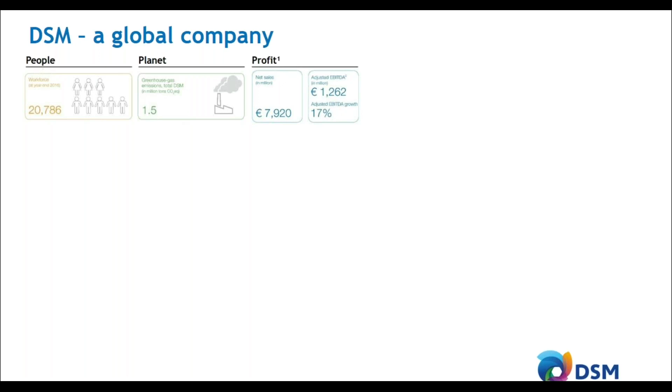DSM is a true global company. We have a bit over 20,000 talents working for us around the globe. As you can see, we are also very concerned about CO2 emissions. Sustainability is a key part that drives DSM and also the solutions that we introduce into the world. So we have a never-ending quest in further reducing CO2 emissions in our plants, but also in the solutions that we bring to you. We have a turnover of around 8 billion euro.

A large part of our talents are working in Europe, almost 10,000 employees, but we also have a global footprint, with a presence of over 5,000 people in North America and Latin America combined, and over 6,000 people in Asia. Our R&D centers are located all over the world - a main R&D center in Geleen, Netherlands, but also in Troy, North America, and in Shanghai.

Our sales are also covered all over the world. A big part of our sales are actually at the high growth economies where China and India take a really important role.

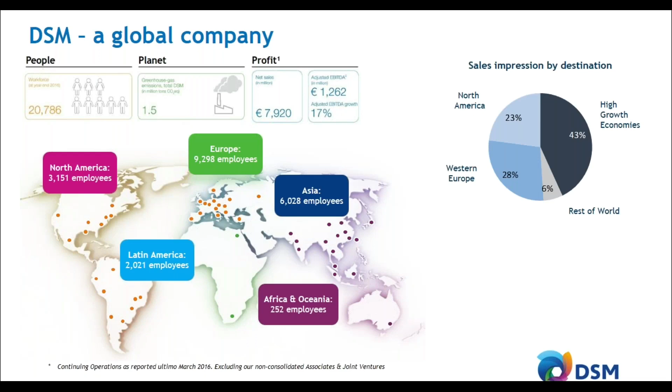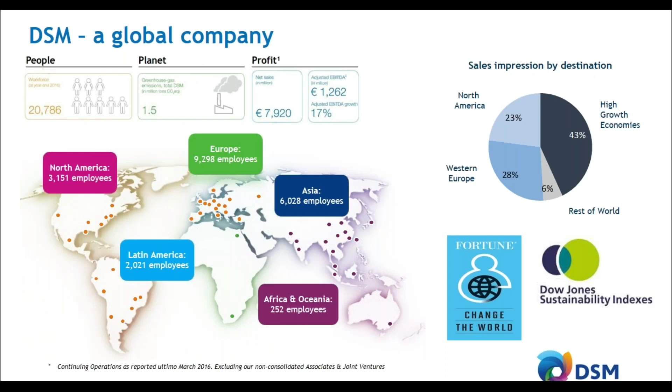We are very proud that over the past 10 years we had a top 3 ranking in the Dow Jones Sustainability Index, as that is one of the key drivers at DSM. We also have been named number 2 in Fortune's list of companies that are changing the world, among JP Morgan and Apple. So we are very proud of that. Our involvement in the World Food Programme, and all the work we are doing to leave the world as a better place for the next generations, is part of that ranking.

So what are we doing in the automotive industry and the electronics industry? As you can see, almost 90% of all modern cars have materials from DSM in them. Typical applications include airbags, chain tensioners, brake boosters, air intake manifolds, engine covers, oil pans - a lot of different applications where we are able to reduce weight or, for example, wear and friction, and therefore improve fuel economy.

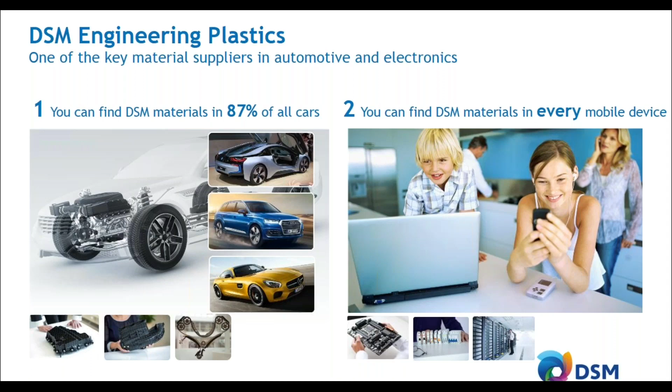On the electronics side, we are present in every single mobile device around the globe, addressing key trends like miniaturization and the elimination of hazardous substances. We have introduced some halogen-free solutions. Lately, the automotive and electronics industries are growing more together, and we see that in the electronics solutions we are bringing to the automotive industry.

If you look at the competences that you would need for lightweighting, there are actually a few. In the R&D center in Geleen in the Netherlands, we combine several of these competences, like, for example, chemistry - we are able to build different building blocks into our polymers that address the needs of the current automotive industry.

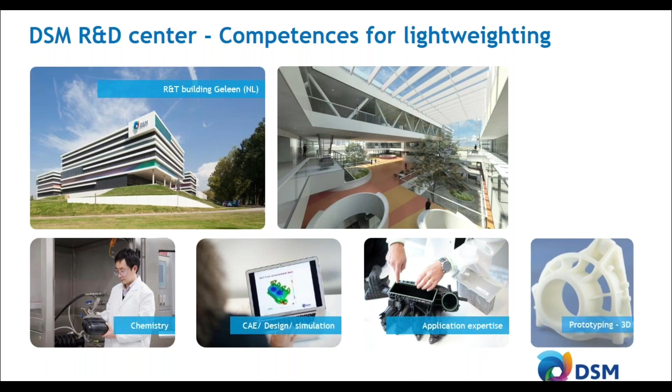We also have the predictive power to not only produce those polymers, but also calculate how your application is going to work, not only short term but also long term in your vehicle. We have application experts that can help you in redesigning from metal to plastic to further reduce weight, but also add additional performance. And last but not least, we are able to do prototyping with, for example, 3D printing, which can help you further reduce your design cycles.

What is one of the key challenges in the automotive industry? Over the past 50 years, the average weight of passenger vehicles has been growing by 10 kilograms every year, and you can imagine that adds up to a few hundred kg.

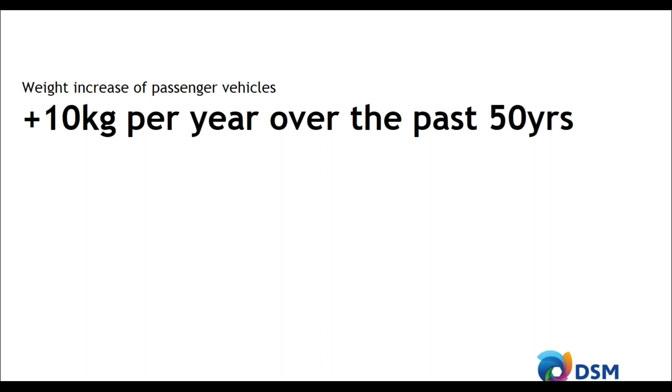And that's for a good reason. Over the past decades, more safety systems have been introduced, like ESP, ABS, and even lighting now can be added to that category. We've been increasing customer experience with adaptive cruise control, infotainment systems, further connectivity, and lately also autonomous driving, so more sensors are being built in. All of these systems require technologies that have a certain weight to them, so lightweighting is very important to accommodate these new technologies.

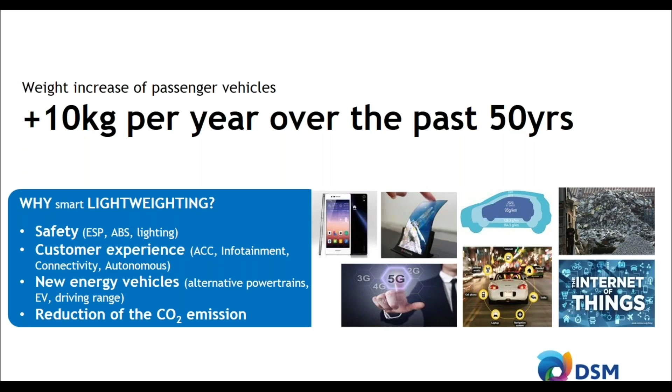Furthermore, new energy vehicles are being introduced, alternative powertrains, for example electric driving, where you have to deal with relatively heavyweight batteries. You still want to keep a certain driving range, so lightweighting is important. Last but not least, the reduction of CO2 is of course very important. Legislation is further tightening; towards 2025 we have to reduce around 44% of CO2 emissions, and lightweighting is one of the key solutions that can be used.

So the reduction of CO2 of almost 44% by 2025 means that in the end a car has to lose a significant amount of weight, almost 200 kilograms. And the question is how to do that.

There are a few alternatives in the market. You can go from steel to aluminum, which is only 1/3 of the relative weight, and that helps a lot to further reduce weight. A second option is to increase the amount of plastics you use in your car, specifically for structural parts in body-in-white structures.

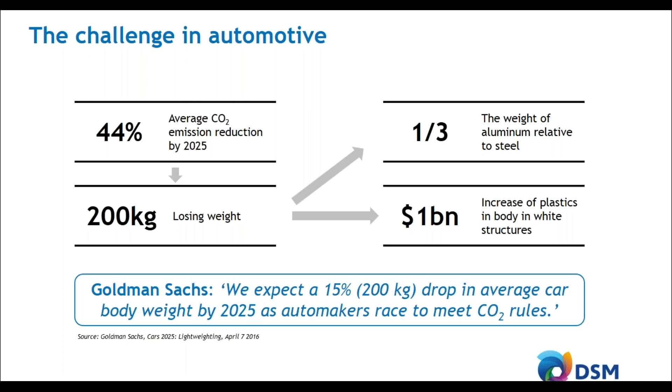But how to do that? Of course, introducing engineering plastics to the automotive industry is not new. Of around 30,000 parts in a modern car, 10,000 are already plastic, ranging from bumper exterior parts to interior parts, but more and more structural parts are being included too - chain tensioners, brake boosters, oil pans, engine covers, and many more.

So if you look at this, the first step in weight reduction is going from steel to aluminum, and the second step is going to engineering plastics, which can further reduce the weight by 50%. That's of course a significant contribution.

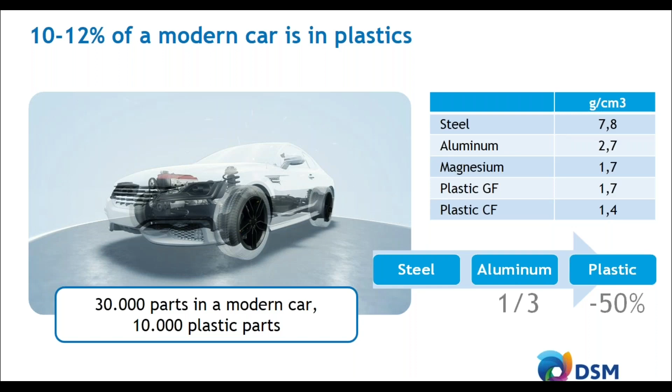So what kind of applications could you actually target? What we see is that some of the relatively easy parts have already been converted to plastics. But there are challenges in other parts, like engine mounts, engine brackets, lighting brackets, and a lot of housings and covers for sensors, electronic power steering systems, ECUs, etc. Many of those are still in aluminum die cast, and they could be replaced with engineering plastics.

These structural parts have a lot of specifications, and they often have to operate in a broad temperature range from -35°C up to 150°C, and still keep their strength and stiffness at these high temperatures. Sometimes these high temperatures aren't required, but you only go up to 50 or 80°C, with very high relative humidity. Also, if your car is parked in Singapore and you start driving, you don't want any influence of, for example, moisture on the stiffness of your part.

So dimensional stability and accuracy are also very important. The mechanical performance of any structural part has to fulfill the static and fatigue specifications to ensure that over the entire lifetime of your car, you still have accurate performance.

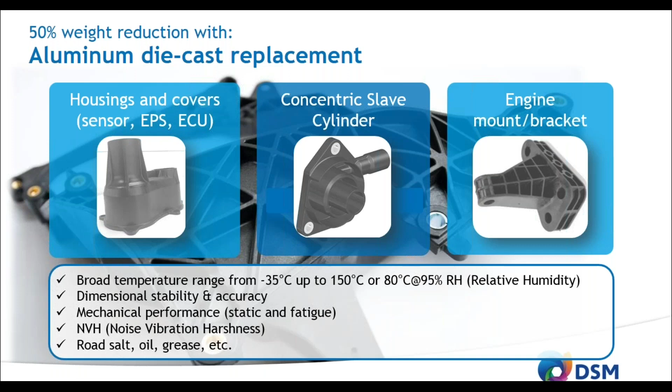As said, most of these parts are still in aluminum. So how to choose between aluminum or engineering plastic? If you take aluminum, for example an alloy A380 which is commonly used in the automotive industry, you see quite some advantages of using these types of materials.

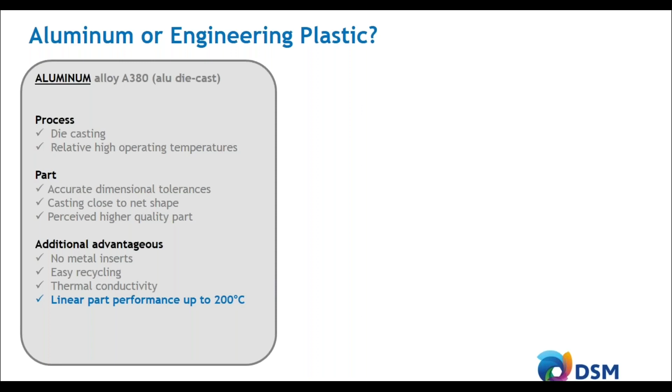One of the key advantages is the linear part performance up to 200°C. Of course, after 200°C, the strength and stiffness of aluminum starts to drop, but up to that point you have very good predictability on how your part would behave. That's often more difficult with engineering plastics, but lately there are new developments that would allow you to go to high temperatures and still calculate with linear part performance.

If we compare it, for example, to PPAs, PA4T, that can be used for injection molding, you also see some advantages of using engineering plastics. Besides the 50% weight reduction that could be achieved, you also can achieve some cost reductions, mostly around 10 to 30%. That mostly has to deal with smart design, less weight, less material, thinner ribs. So the injection molding cycle time can be reduced, and you gain some high production efficiencies. So often if you want to go to high series, a few hundred thousand parts, injection molding with engineering plastics can be a real benefit.

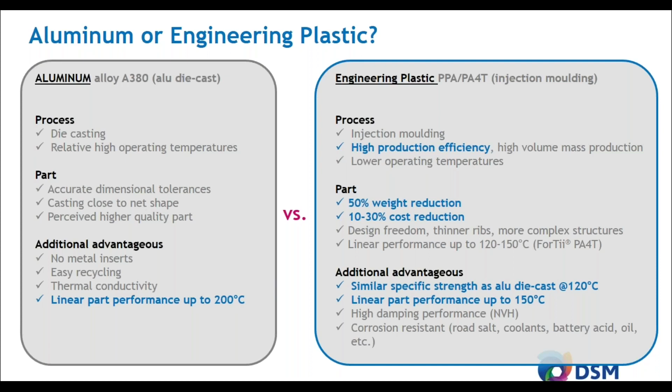But what about the part performance? What about the temperatures to be achieved? With PPAs, you can push the boundaries, and we see that PPAs could really be the next best alternative to aluminum. With glass transition temperatures up to 150, 160 degrees C, we see that these materials can be used and are as strong as aluminum up to around 120 degrees C.

But of course, there are also some reservations, some concerns when going from metal to engineering plastics. A lot of these you probably will recognize, and if you are a designer or an engineer who has to go from metal to plastics without much experience, you see a lot of difficulties. It's difficult to predict the part performance. What if something unexpected happens, like a battery acid spill, or the peak temperature goes higher than expected? There are a lot of situations where you can feel insecure about what is going to happen to the plastic. So if you take a step and go from metal to an engineering plastic, you also need to make sure you choose the right one.

Here at DSM, we also know that it's not about the data sheet. So we do extensive testing of our materials and parts that are relevant to you, to take away a few of those concerns.

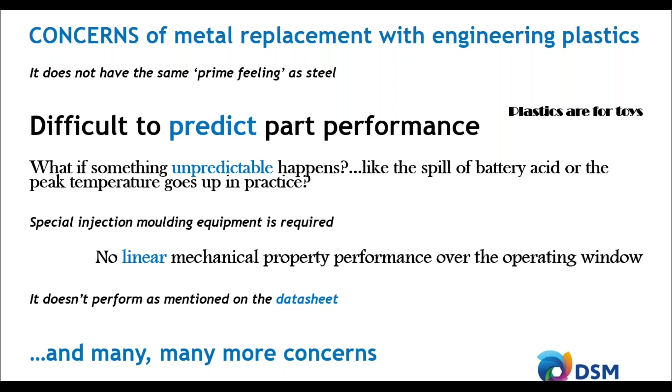So let's dive a little bit deeper into three topics that are very relevant if you engage in a journey from metal replacement to an engineering plastic. First of all, which plastic to choose, which polymer to choose? How do you do that? Let's first address that topic. After that, we go into testing and predictability. The predictive power of the material you're going to choose is absolutely important to assess which material to select and how it will perform over the lifetime in your application. And last but not least, processing is also very important.

Let's start with choosing an engineering plastic. Here you see a triangle that addresses quite a few of the engineering plastics out there in the market. There are actually two categories: one is the amorphous part, and the second is the semi-crystalline materials, for example polypropylene, the polyolefins, the polyesters, the polyamides. We will focus on these semi-crystalline materials because they are often used in the automotive industry to replace metal parts.

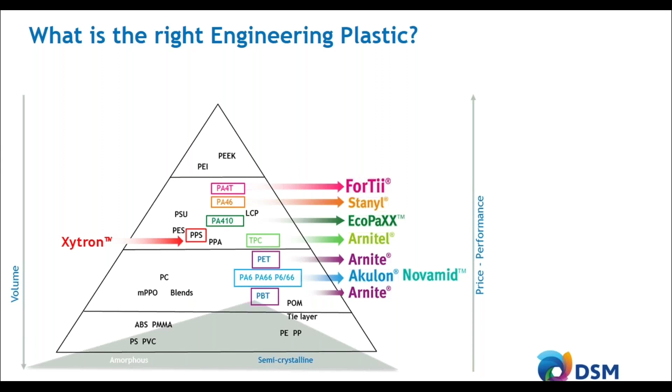So if you look at engineering plastics, you see a few mainstream materials that are often used. The first one is PP, part of the polyolefin cluster. Then you have the polyesters with PBT and PET. You have the PPS materials, often used in combination with thermal management applications—excellent for chemical resistance and very low moisture absorption. And as a fourth bucket, you have the polyamides. Polyamides like polyamide 6 and 6,6 are very often used for metal replacement in the automotive industry.

Actually, in the polyamide family, you have two different subsegments. The first one is the aliphatic polyamides, polyamide 6 and polyamide 6,6. Especially polyamide 6,6 is one of the key materials being used, and we will also use that as a benchmark during the comparisons with aluminum, but also with the PPAs we are going to introduce. The second part are the semi-aromatic polyamides, the so-called PPAs, polyphthalamides, where you see a ring structure introduced in the polymer. With that ring structure, you gain a few features that are very relevant if you want to replace metal with engineering plastics, and we will dive a little bit deeper into that field.

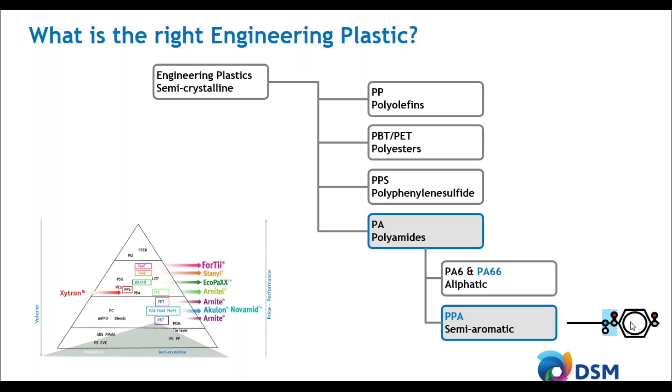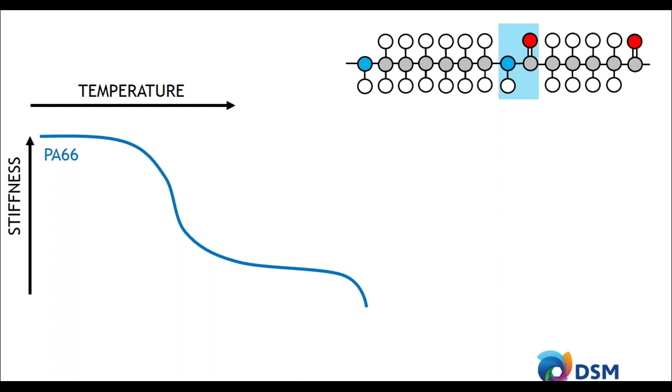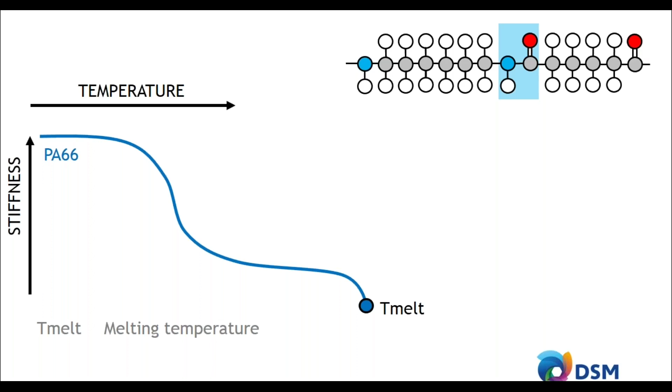The first one is, of course, the melt temperature. The melt temperature for a polyamide 6,6 is somewhere around 255 degrees C. That means if you reach peak temperatures above that, you will end up with a very fluid polymer, and this material cannot be used.

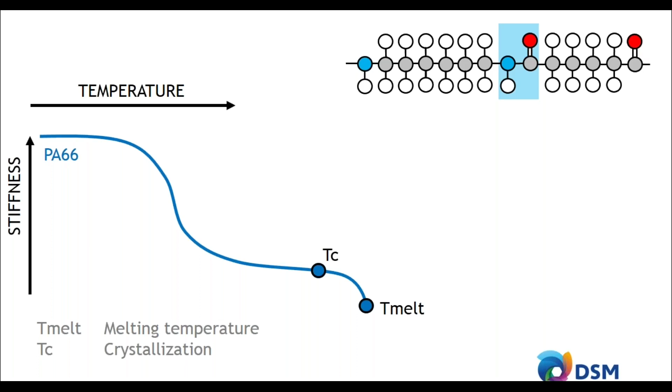You have the crystallization temperature, also very important, because below that your material gets its structural integrity. And the third point is also very important, called the glass transition temperature. This represents a large step in the performance of your material. Below the glass transition temperature you have a very rigid, glassy state, and above that a more rubbery state. The glass transition temperature of a polyamide 6,6 is around 70 degrees C.

On the top right, you see the chemical structure of such a polyamide 6,6. In the middle, in blue, you see the amide group bonding two different monomers, two different building blocks. On the left you see a diamine, and on the right you see a diacid. As said, these materials have a glass transition temperature of 70 degrees, meaning the stiffness and strength drops significantly around that point.

But what if you would introduce a ring structure in this polymer? If you introduce a ring structure, a lot is happening. You can actually increase the glass transition temperature from 70 degrees up to 150 or 160 degrees C. These type of polymers are called PPA, and DSM has a PPA based on the PA4T technology, where the T represents that ring structure. So you increase the operating temperature already.

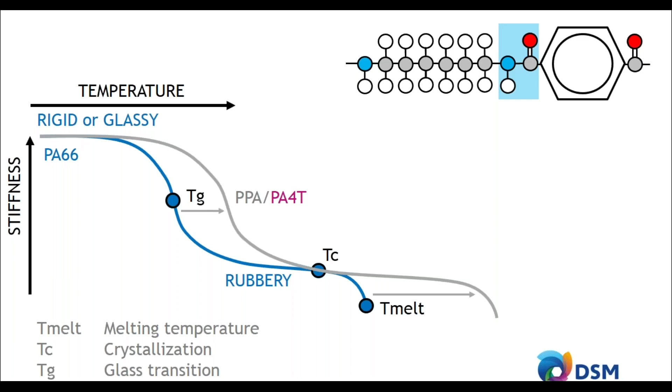NVH could be improved because that is a combination of stiffness and damping, and that stiffness is increased across a higher temperature range. PPAs also show much lower and slower moisture absorption, meaning strength and stiffness are not as influenced by moisture as with a polyamide 6,6. A polyamide 6,6 can already absorb the maximum amount of moisture in around 1 to 2 weeks, while a PPA takes over half a year to absorb that amount. That also means the dimensional stability of a PPA is generally higher than for a polyamide 6,6.

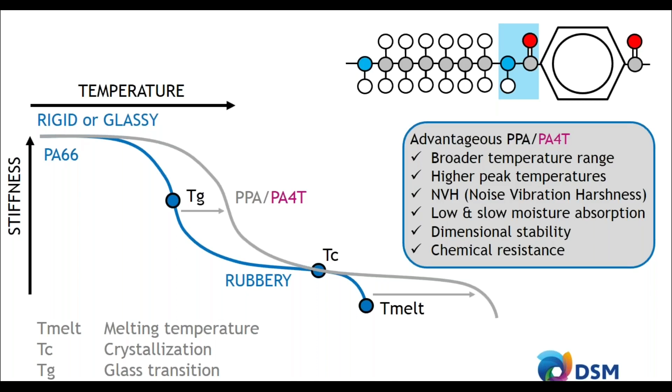Last but not least, the chemical resistance of PPAs is much higher than with a polyamide 6,6. That means you do not have to worry about road salt, engine oil, transmission oil, and all kinds of acidic environments you could have in a car. That also makes PPAs very suitable for thermal management parts, because they can deal with water glycol resistance.

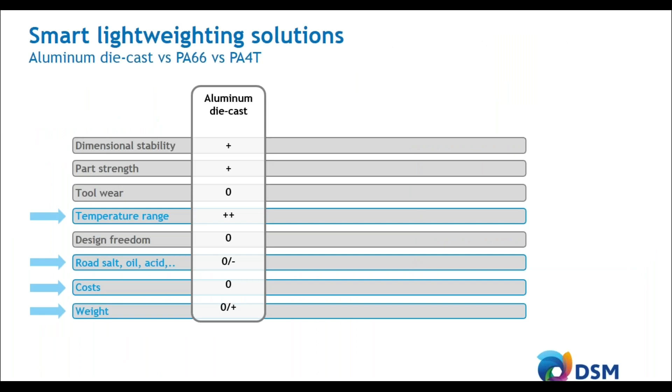So if we make a short recap with aluminum die-cast, polyamide 6,6, and PPAs like polyamide 4T, you see that choosing the right polymer is very important for your part. We already addressed the temperature range, which is very important. With aluminum, you can make a design up to 200 degrees C while still keeping stiffness and strength, whereas with polyamide 6,6 you see a significant drop in strength and stiffness already at 70 degrees.

With PPA, you can make a design up to around 150 degrees C, meaning that a PA4T is really the next best alternative to aluminum die casting. You have further advantages in dealing with harsh environments, because the chemical resistance of these PPAs is much higher than a 6,6 or even aluminum. And obviously, you have a weight reduction potential of up to 50% and a further cost reduction potential of 10 to 30%.

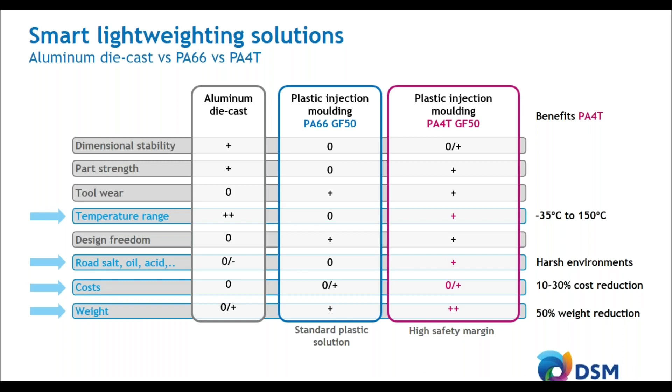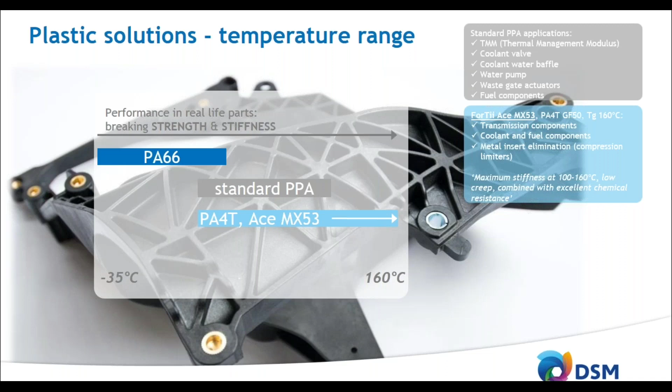But is this also enough for structural parts? If you look, for example, at an engine mount or a housing, they also have to work from minus 35 or minus 40 degrees C up to around 150 degrees C. It has to work over the entire temperature range. And with this latest innovation, with this latest material, ForTii Ace MX53T, we are able to expand the scope of PPAs really into load-bearing structural parts for the automotive industry. And that's unique in its kind, and that's something we will dive a little deeper into.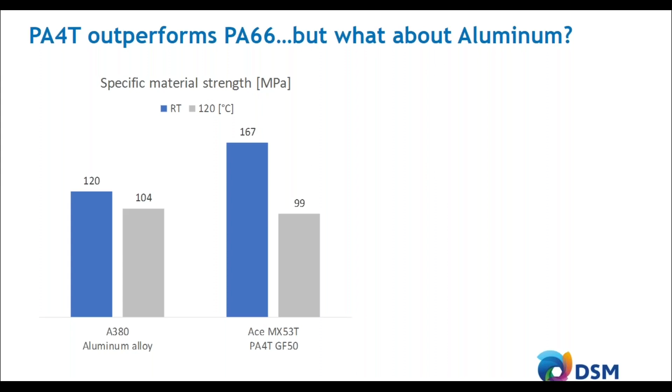But what about PA4T? If you look at the specific material strength of polyamide 4T with 50% glass, you see that at room temperature it actually outperforms aluminum. And at 120 degrees C, it is on par with aluminum, meaning that these types of materials can be used to replace aluminum. So the ForTii materials are PPA and they are based on the strong PA4T technology of DSM.

ACE MX53T contains around 50% glass and is very suitable for aluminum die-cast replacement. So you can actually achieve 50% weight reduction and cost reduction. Due to its low and slow moisture absorption and chemical resistance, it's also a very robust design. It enables designers and engineers to realize a real robust design.

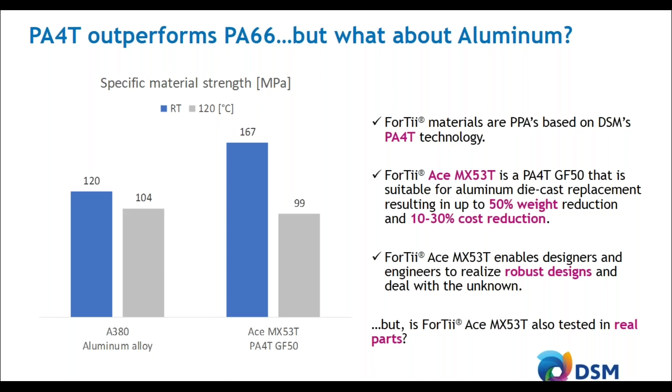Question: of course this is all nice, but is it also tested in real parts? And there we want to show you a bit on how we design at DSM. So some testing and some predictability. We know it's not about the datasheet, it's all about the part performance. And that's also why we do not design our materials based on a standard tensile bar or a notch tensile bar. But we make parts like bending beams, load brackets, EPS housings, and we test them extensively to see how the materials behave under static load conditions, but also under fatigue conditions during the lifetime of your part.

What we see is that with ACE MX53T, we have a consistently higher performance of up to 40% compared to other PPAs, from minus 35 degrees up to 150 degrees C.

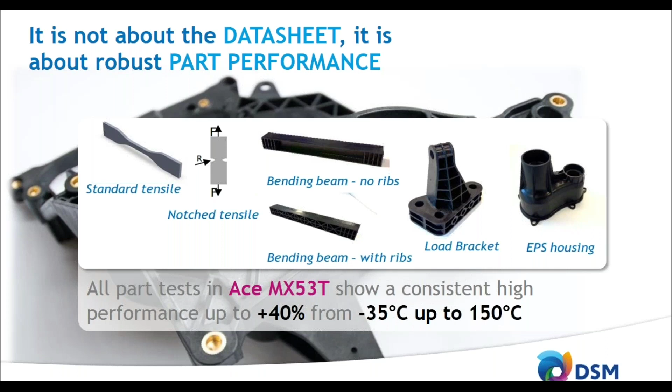So let's take one of the case studies. If you have an electronic power steering system in your car, you actually have two different types, but they all contain a housing, and that housing is mostly aluminum die cast. They weigh around 1.1 kilogram. Mostly multiple machining actions are required to meet the full dimensions. We are able to replace that with a polyamide 4T with 50% glass, reducing 50% of the weight and around 10% of the costs.

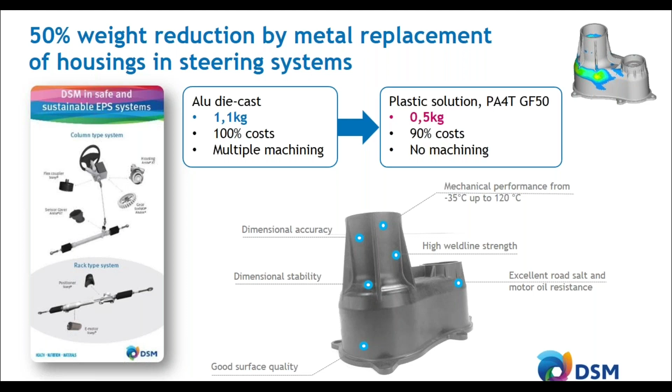Typically, these parts have to perform from minus 35 degrees C up to 120 degrees C, need a very high dimensional accuracy and stability, good surface quality, and of course they have to be able to deal with road salt. So how would a design like that look?

At DSM we have the capability to design our own tools. So here you see how we designed the tool for the EPS housing demonstrator, and we also actually designed the cooling channels in that mold to make sure we have a good controlled production tool that we can use for making these types of demonstrators.

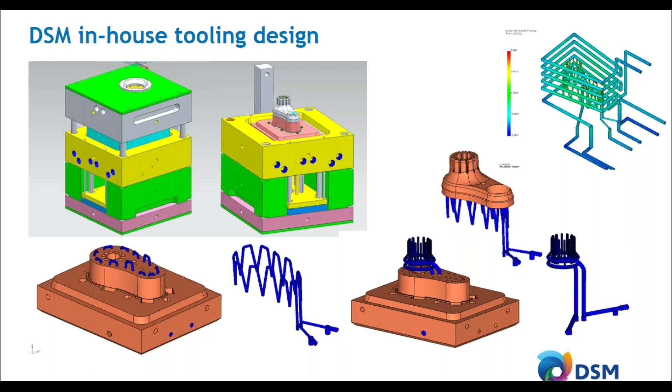Then the whole work starts. What kind of predictive power do we have? Well, if you have an EPS housing, there are two load cases that we normally use. We put a certain static load on these parts, and we're going to check when these parts are going to break. First of all, of course, we're going to predict that. We're going to simulate at which maximum loads these fractures occur. And then we're going to see in practice how that matches up. At this moment, we are able to simulate where and when a part breaks within 10% accuracy, which is an enormously high value.

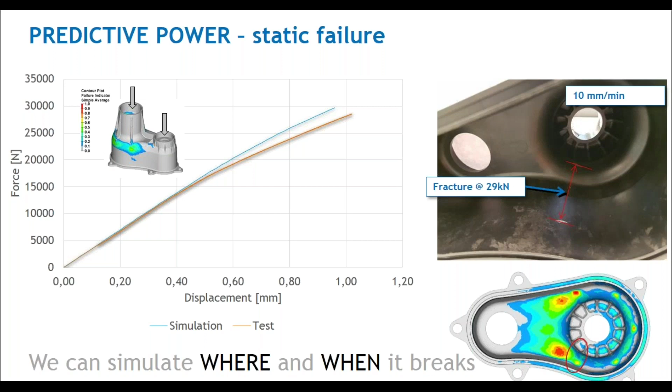Of course, before reaching that stage, you have to do a flowability analysis, look where the weld lines are of your part to see that they are not in critical areas where you have high stress concentrations, so we are able to optimize the design.

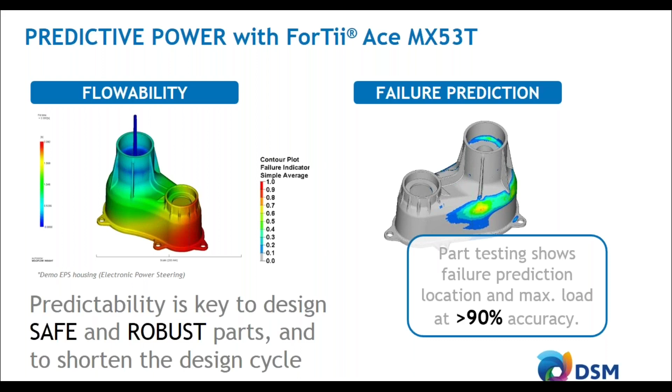And then, of course, we go into the failure prediction and then compare it to testing. So at this moment, we are able to do that with 90% accuracy. And this is about the static loads that we see on a part.

But what about testing it for long life? There we have used, for example, a demonstration part that is called a load bracket, which resembles an engine mount. There we are able to test the longevity.

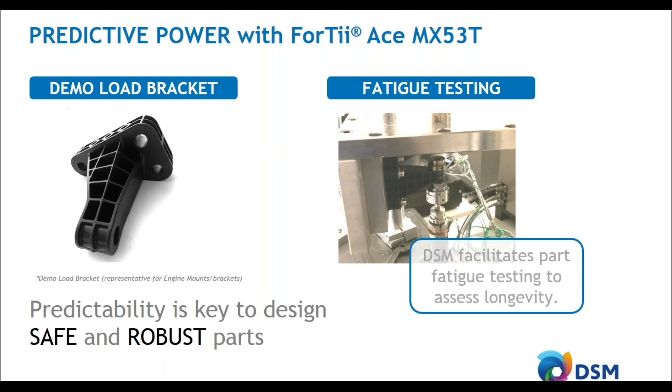And what you see here is one of the test setups that we have available at DSM in our Geleen research facility in the Netherlands, where we typically test those parts. And because the predictability is that high, we also know that we can help you design safe and robust parts.

So having covered the choice of the engineering plastic, the testing and the predictability, but what about the processing? In the end, we also have to realize those parts. How difficult is it to injection mold a PPA in comparison to a polyamide 6X?

Well, we know that the processing is very important because in the end you have to realize mass production. And therefore, during the design of our materials, we take processing into account. A few things are very important.

First, we want you to be able to work with standard hardware that you can get from different injection molding suppliers. And that's also the case with the ForTii and the ForTii Ace materials. You can use standard polyamide hardware for high glass-filled polyamides. We also see that there is no corrosion or melt deposit for the ForTii portfolio that is being used for metal replacement.

Furthermore, residence time is very important. Which kind of machines can you use, which kind of tools, how big are the applications that you can actually make? So therefore residence time is very important. Our unique production process of our ForTii portfolio also allows for a high residence time.

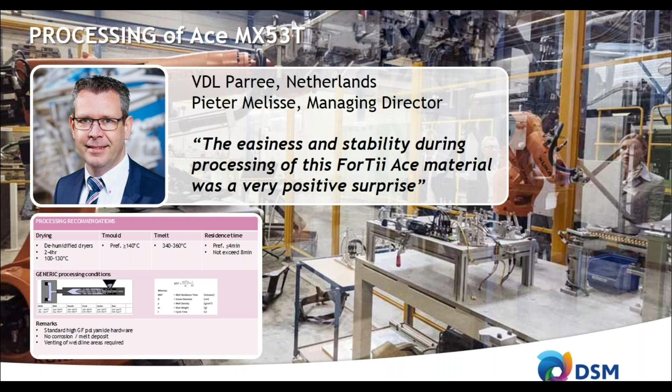But of course, I can imagine that you also would like to see some proof. What we typically do is we do a lot of design of experiments. We do extensive testing of the materials on different machines under different settings to ensure that you can have an easy and robust processing.

This is a typical example, a part of the DOE that we have been doing for ForTii Ace MX53, so the PA4T with 50% of glass. We made a variation, for example, in the melt temperature, in the residence time, and also in the mold temperature. And then we're going to assess the modulus, stress at break, and for example, the elongation at break.

And what you typically see is that within the operating window, with the melt temperature, the residence time up to 4 minutes, a mold temperature from 80 degrees up to 200 degrees C, there is very limited variation in the stiffness of the material, the strength, and also the elongation at break.

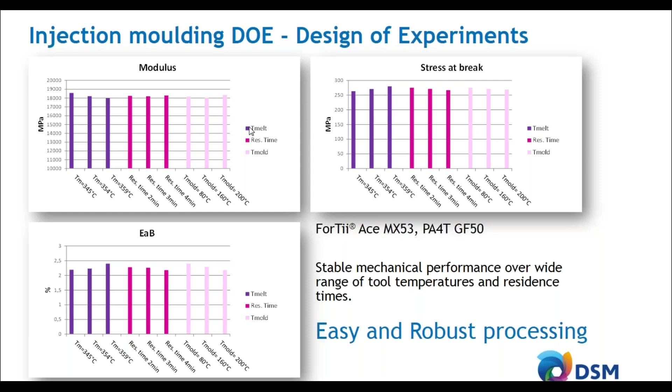So the materials in our portfolio for metal replacement are very stable in processing, and that's also the feedback that we get from our customers, like for example VDL.

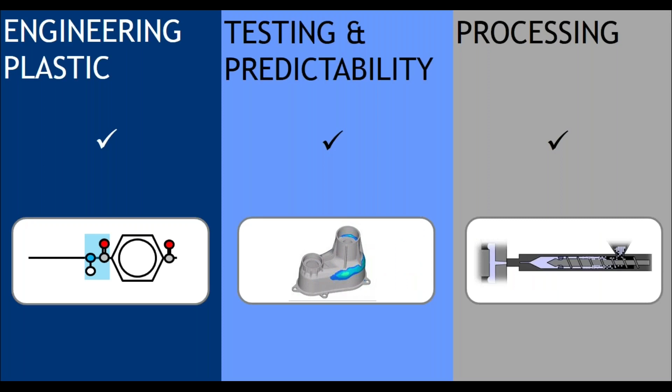So we have covered now a few very important topics in the field of going from a metal to an engineering plastic, how to deal with the prediction during lifetime and also with processing.

So what are the takeaways of this webinar? The automotive trends, again, they have to lose around 200 kilograms of weight for various reasons to improve the fuel economy and also open up the opportunity to go to new energy vehicles. In total, we have to reduce the CO2 emission by around 44%. And that's a very challenging task.

Going from metal to aluminum already helps with reducing that weight significantly. But also a next step can be taken from going from aluminum to an engineering plastic. Around 50% of weight reduction can be achieved. And there is also the potential to reduce the cost with around 10 to 30%, depending on the secondary operations that are normally needed for the aluminum die-cast operation.

We see that polyamide 4T with 50% of glass is one of the key materials that can be used to replace aluminum. Due to the fact that it has the high chemical resistance, low and slow moisture absorption, and it's almost on par with the strength and the stiffness of aluminum, that you can have a very robust solution.

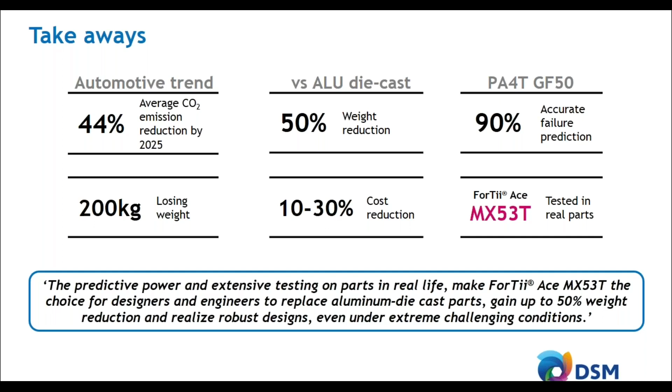We are able to predict with around 90% accuracy, and we have tested the material extensively in real parts. So if you are looking forward to taking up that challenge, we have the right materials and also the right competences to help you with that.